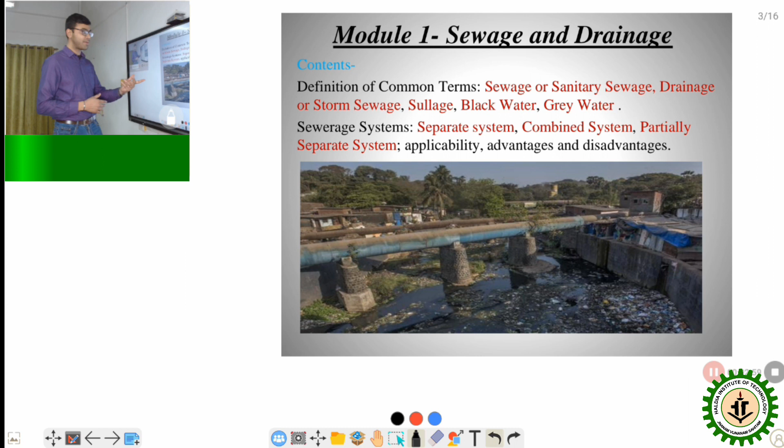This is actually the sewage. Different kinds of waste are dumped in a single place, and moved from this place to that place; after a few days, the sewage becomes a black kind of thing. So we'll discuss what black water is and what grey water is.

So the next thing is sewage or sanitary sewage. Different terms you have to remember. In different kinds of exams, they can ask what sanitary sewage is. You have to remember sewage as well as sanitary sewage, both these terms.

Sewage, or municipal or domestic sewage. As you can see from this term, the sewage which comes directly from the domestic or residential part is called sewage or domestic sewage. The definition: municipal sewage is the waste produced from the community of people. Community of people means from our society.

It is characterized by its volume, physical, chemical, toxic constituents, and bacteriological status. The physical, chemical and biological parameters, and its treatment, you will go through in the next few chapters. These are very important chapters from the competitive exam point of view as well as the GATE point of view, NET point of view.

There are different kinds of sewage. The total sewage is from our society. Our society consists of residential buildings, institutional buildings, industrial buildings. The whole waste is called the sewage. But there is a differentiation there.

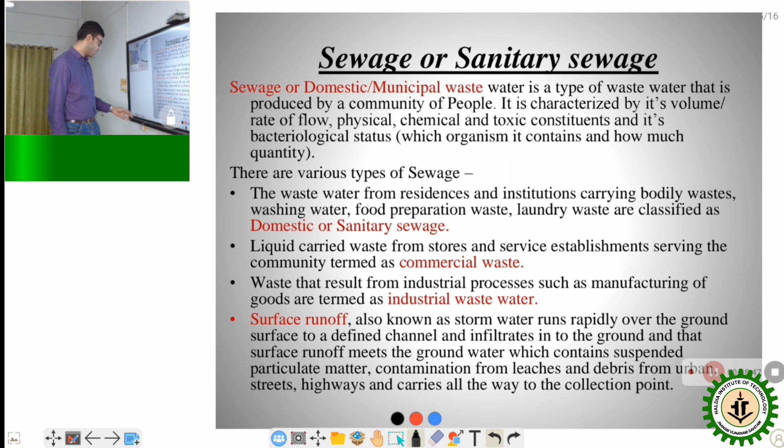It actually contains heavy amounts of suspended particles. Just because this runs over the ground and infiltrates the ground, it has heavy contents of suspended particulate matter, and it touches the debris, touches the municipal solid waste products. So that's why there is a very big amount of contamination in the surface runoff.

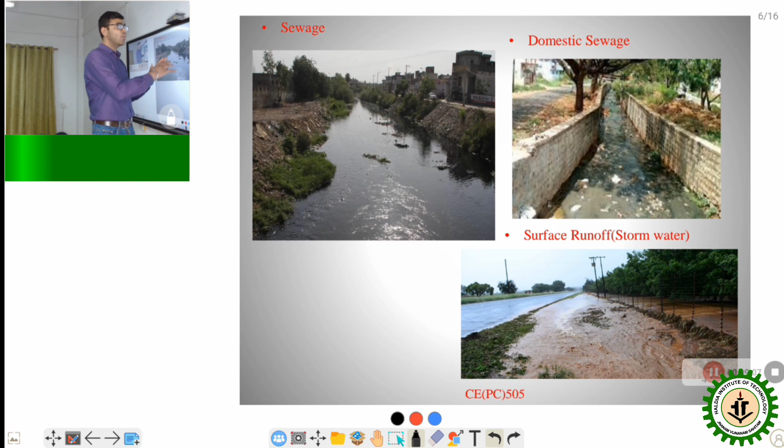Okay, from this image you can see this is a sewage. We can see this in every city also. This is a domestic sewage which comes from domestic purposes, and this is the surface runoff. These three kinds of waste are there. We are accumulating it into a single collecting point.

So the next thing is what are the different kinds of pollutants. We have gone through the different types of sewage. Sewage means pollution; it has a certain amount of contamination. As we have said already, storm water has a certain amount of suspended particles. In domestic sewage there isn't that much suspended particles, but storm water has a very high amount of suspended particles.

Okay. So different types of pollutants are present in sewage: organic pollutants, pathogens, as well as inorganic pollutants. Sewage is a complex mixture of chemicals. Distinctive chemical characteristics include high concentration of ammonia, nitrate, phosphorus, nitrogen, alkalinity, turbidity, suspended particles, everything is there. The pH ranges from 7 to 8.

The organic concentration is very high in domestic sewage. For that organic contamination, the BOD and COD amounts are also high. As we all know, drinking water BOD should be nil, but in domestic sewage the BOD and COD concentration is very high. So this needs to be treated.

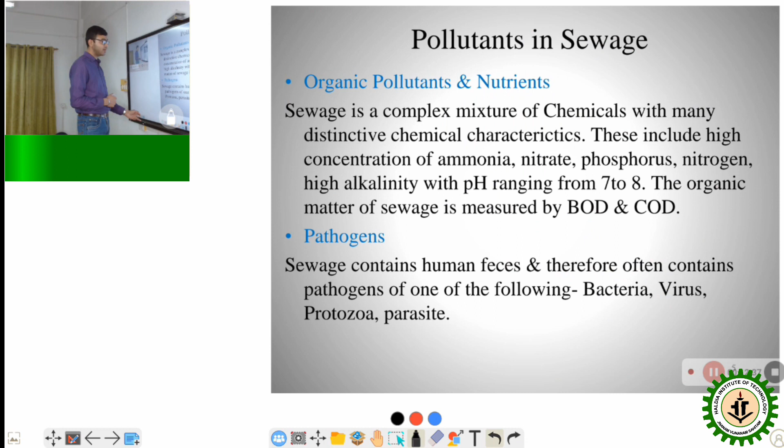So the next thing is drainage or storm water. We have already discussed what storm water is in the last slide. We called it surface runoff. Surface runoff, drainage, storm water are all the same things. You have to remember the separate terms. Storm water is water which originates from the rain, but not only rain. The question might be whether it is only the rain. No, not only the rain.

It includes snow, ice melt; different places have different kinds of precipitation. If you consider a place like Sikkim, there is snow, ice melts, and that generates runoff. So not only rain, different things can generate runoff. Storm water can infiltrate through the soil, be stored in the land surface, evaporate, and most of the time is conveyed directly to nearby streams, rivers or other water bodies without treatment. We already discussed this in the last slide. So just remember that, the drainage or storm water.

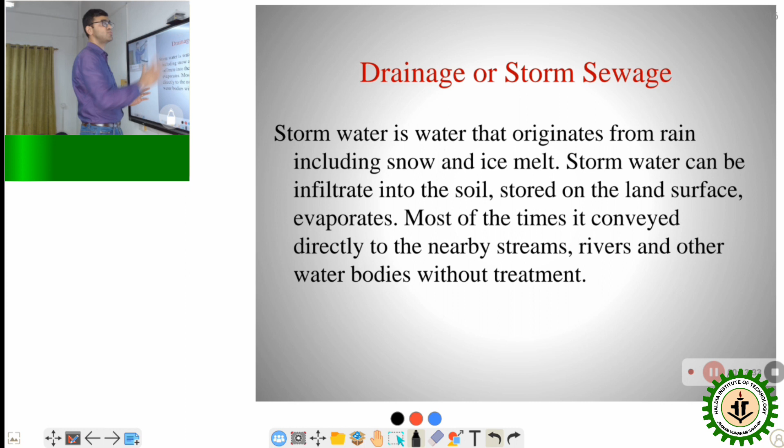Next comes an important term, that is sullage. Grey water, black water, different important terms are there. These are very important. We have already discussed sewage, and now we are discussing sullage. Different terms, but they sound similar. Sullage is domestic waste other than that which comes from the toilet. Sewage means accumulating every waste. But sullage is the waste other than the toilet.

We generate toilet waste like feces, urine, toilet papers. Except these things, the whole waste is called sullage. Domestic waste like vegetable peels, laundry waste also comes under sullage, but not the waste we generate from toilets or urinals. Sullage, which comes from food preparation, personal washing, washing of household properties and clothes, is also called grey water. The water which does not contain any toilet waste is called sullage or grey water.

Next, black water, the opposite thing. Black water comes from the toilet. So you have to understand the difference: grey water doesn't contain toilet waste, black water contains toilet waste. Black water, which comes from the toilet, likely contains pathogens. Basically, it contains human feces, urine, water, and toilet paper from the flushing of toilets. It's a very clear, easy thing actually.

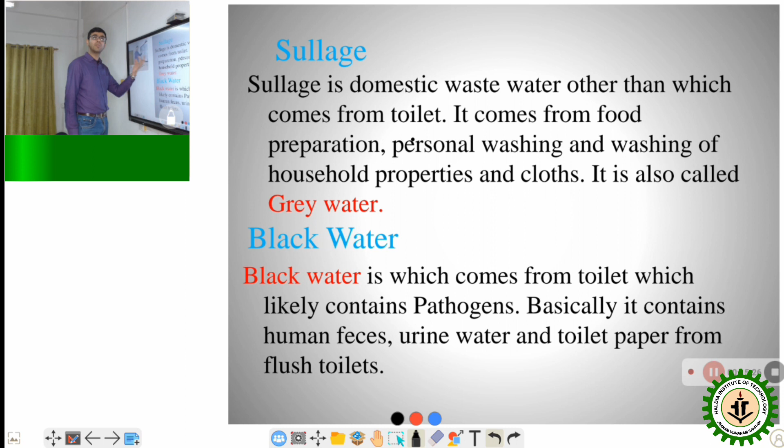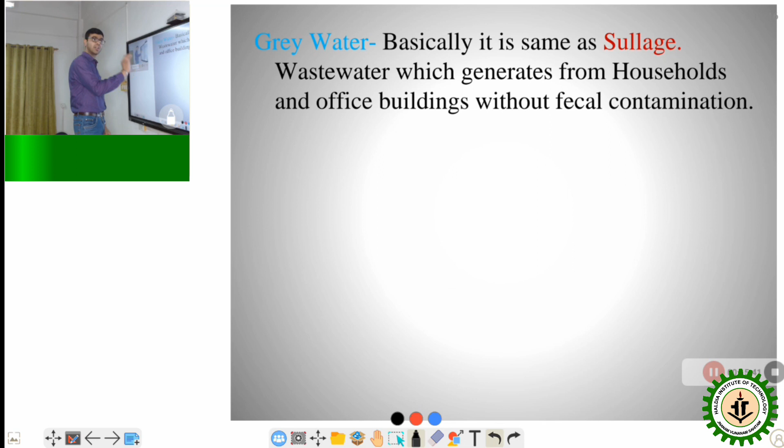Grey water, black water, sullage. Grey water is basically the same as sullage, which we described here. Sullage or grey water is the same thing, so we are not discussing this slide. So now comes the different conveyance systems.

We have already discussed different kinds of waste, how we are generating it and how we are getting it in a single field. But now we have to discuss how we are transporting it. The household waste we generate, we dispose of in our drain. The drain goes and meets a bigger drain. That bigger drain meets the nala kind of thing in our city, and that nala is going to meet the river. So this transportation of waste we have to consider.

We have to consider different types of conveyance system. It is called the sewage or sewerage conveyance system. Basically, three types of conveyance system are there: separate system, combined system and partially separate system.

A sewage system is the infrastructure that conveys sewage and surface water using sewers. It is composed of receiving drains, manholes, pumping stations, storm overflows and screening chambers. Three parts: separate sewage system, combined sewage system and partially separate system. Separate sewage system means, as the name suggests, two different types of pipes, two different collecting systems. One pipe is for the sewage and one pipe is for the storm water.

Why are these two different? Because storm water contains a heavy amount of suspended solids, and with a heavy amount of suspended solids the pipe can be choked anytime. But domestic, household or municipal sewage doesn't contain that much suspended solid, but it is more contaminated compared to storm water. So two separate pipes are there for the two separate wastes: one for carrying the storm water or rainwater, and another for carrying the sanitary sewage.

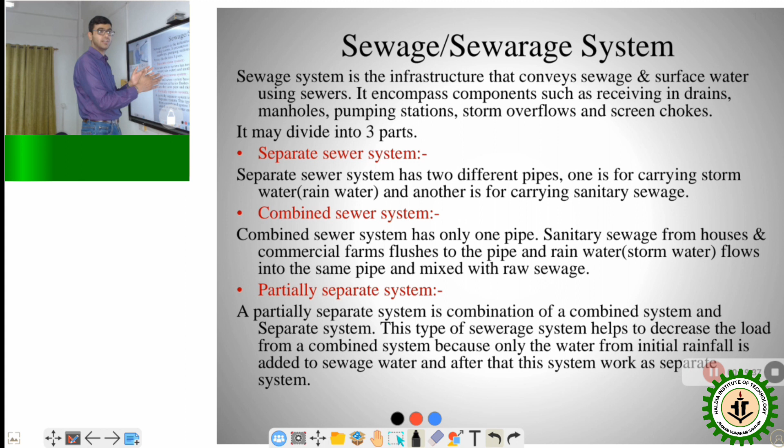We have understood the main difference, but the main thing to consider from the exam point of view is the advantages and disadvantages, and the comparison between the separate, combined and partially separate systems. So now we are heading to the advantages and disadvantages of these three systems.

First one is the combined sewage system. Less construction cost: we don't need two different kinds of pipe, just one single pipe, so there is cost cutting. No choking problem, because one bigger pipe is there for both kinds of sewage. The strength of the toxic water will be reduced.

Disadvantage: due to the sewage, some toxicity prevails in the system. Domestic sewage, feces, grey water, black water, everything is collected in a single system, so there is toxicity, pathogens and bacteria, which is a disadvantage. The initial cost will be higher because the whole city has to be accommodated in a single pipe, but construction cost is less because we don't need two pipes.

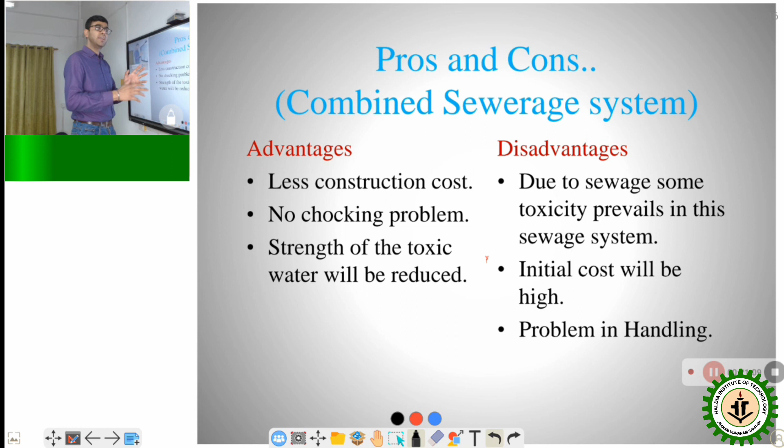Problem in handling: bigger pipe, we have to handle it carefully. Next thing is the separate sewage system. Advantage is there: the storm water will not become toxic. Storm water is a different thing. In the previous system, the combined sewage system, we have discussed the single pipe. It is collected at a single point. There storm water is also there, domestic sewage is also there. Storm water is not that much contaminated. So storm water doesn't need that much treatment, but the domestic sewage needs the treatment. So in a separate system, we can separate the storm water that doesn't need the treatment.

So we can just treat the sewage water. So the storm water will not become toxic, more efficient than the combined system. Two different systems of pipes, more efficiency is there. Problem of choking: as we have already discussed, the suspended solid particles are much higher in the storm water, so there is a problem of choking. Flushing will be required for cleaning purposes. If it's choked severely, we need to flush, we need to maintain it as early as possible.

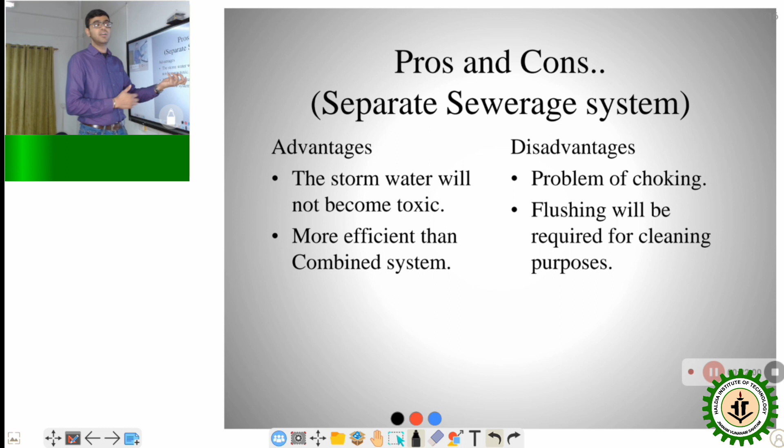Next thing is the partially separated system. The sizes of sewers are not very large and some portion of storm water is carried through the open drain. Silting problem is completely eliminated because it is partially separated. When the first rainwater comes, more of the sewage is there. Storm water will be less toxic. The disadvantage is that the storm water will put some extra load on the treatment system. The toxicity of the sewage water will increase. These are some advantages and disadvantages of these three systems.

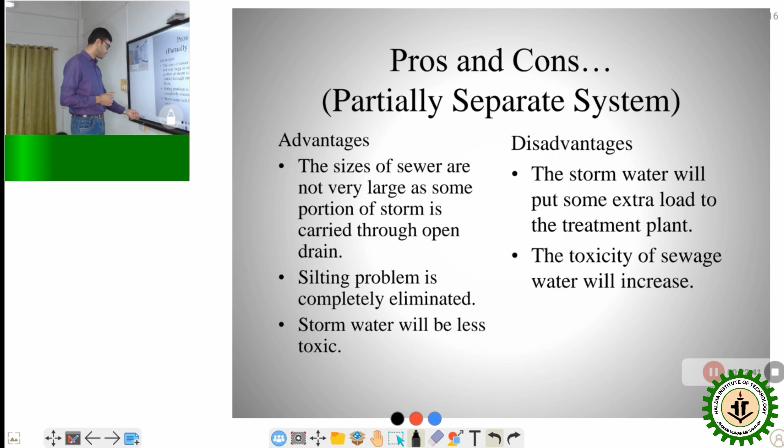And now the comparison between combined system and separate system. This slide is very important for a 5 marks question or short note kind of question for our curriculum. So you have to remember this from the exam point of view. We have already discussed this broadly, we are just going through these points. What is the actual difference between the combined system and separate system? As treatment of both sewage and storm water is done, treatment is costly. The quantity of sewage to be treated is less for the separate system because no treatment of storm water is required. In the separate system, we have a different pipe for the storm water.

In cities of less rainfall, this system is more effective. Where the rainfall is very less, why would we prefer two different drain pipes? Cities like ours, Kolkata, we don't have that much rain. Only the rainy season is there for the rain. So why would we have two different kinds of drain pipes? We can accommodate it in a single pipe system, that is a combined sewage system. In cities of less rainfall, this system is more effective. In cities of more rainfall, the separate system is more effective.

Overall construction cost is higher than the separate system. For the separate system, two sets of pipes are required, but this system is cheaper. Two lines are laid and the first construction cost is less, but the maintenance cost is very high for the separate sewage system because there is a problem of choking and flushing. So we have to identify it according to our city. The combined system is more suitable for narrow streets, the streets which can only accommodate one pipe. In narrow streets, the separate system is difficult to use. Two different pipes we have to accommodate, so in narrow streets it is not possible.

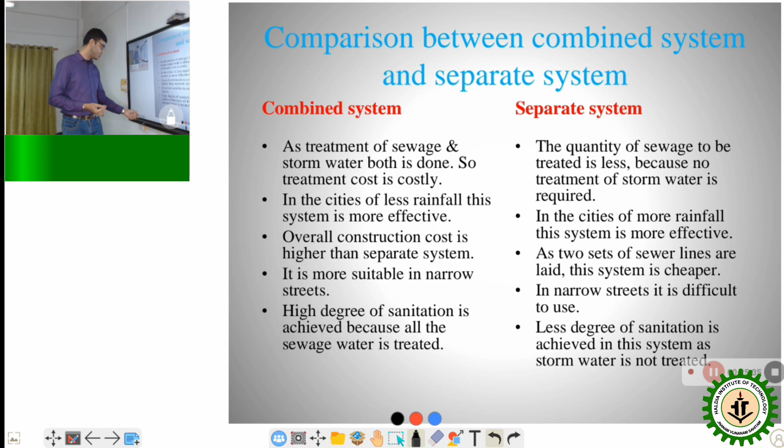High degree of sanitation is achieved because all the sewage water is treated. In the combined sewage system, we are collecting rainwater as well as sewage, so the whole water is being treated, so a higher degree of sanitation is there. Less degree of sanitation is achieved in the separate system as storm water is not treated. It is very clearly written what is the difference between the combined system and separate system. So this is all of the basics which we have learned in the first chapter. We will use these terms in our next classes also, so you have to remember them very carefully. So this is it for the day and thank you.